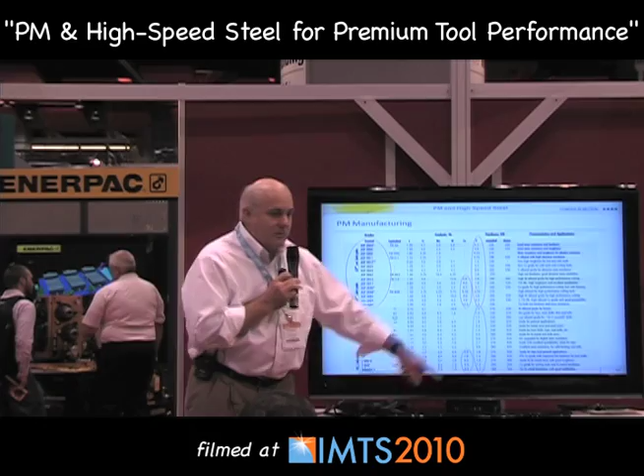But with the PM process, it just gives the simple variation that we can add higher levels. You can see up to 8 or 9% vanadium instead of 1 or 2%. And even in the cobalt grades that are designed for high resistance to softening, we can also put more vanadium in those. So all it does from a user standpoint is it presents us as a steel mill with a method of making steels that have more alloy content in them. So we can widen the range of usable properties.

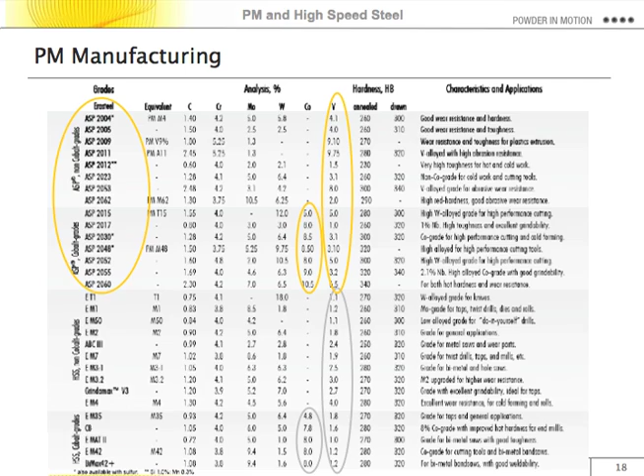For a user, that presents a couple of possibilities. Number one, it means you can take existing tools and look at improving their performance in a number of ways. We can make higher alloy steels. That means we can make them more wear resistant, we can make them more heat resistant, and you can look at them and say, all right, I want to go to a faster speed.

I want to crank my spindles up. I want to go from 70 meters a minute to 100 meters a minute. How do I get there? And when I do that, I'm increasing heat on the tool. What can I use to keep the tool from softening when the heat goes up?

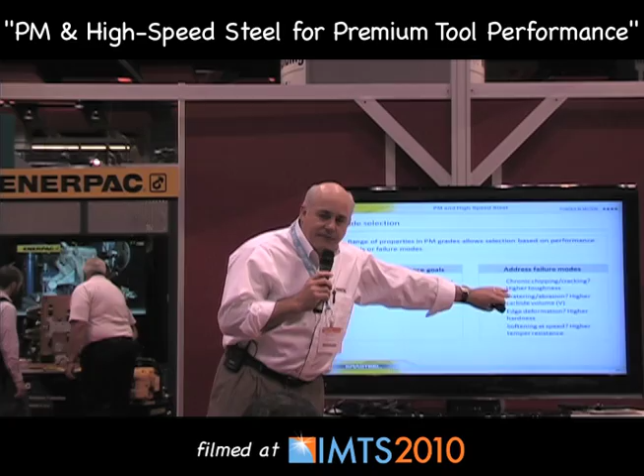Do I have a more abrasive work material that's cutting down my tool life? What can I do to increase the wear resistance of my tooling without going to a more expensive material like carbide? It also presents the option that if you have chronic failures in high-speed steel tools...

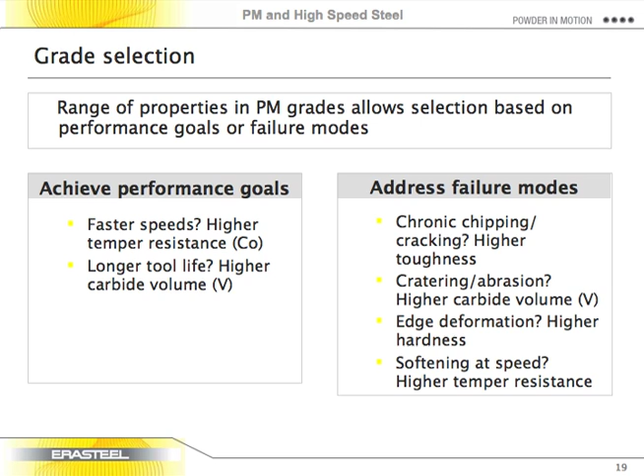If you have a lot of edge chipping, if you have excessively low tool life, you have the ability to find higher levels of those properties to address failure modes, so that if you have chipping, if you have wear, if you have deformation, you can find materials that will address those failures and make your tools a little more successful.

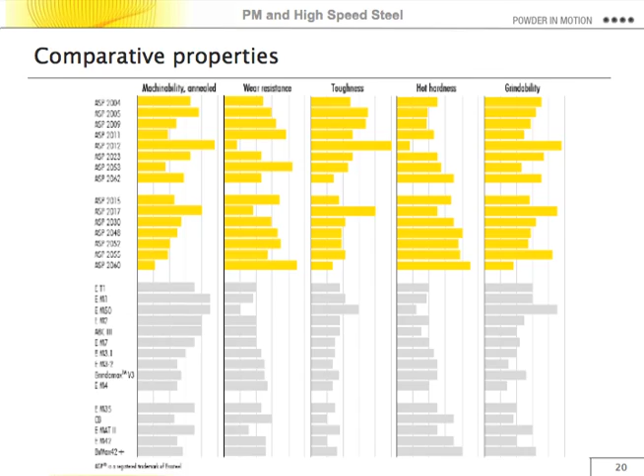Again, we go back to this range of steels and say, rather than look at what steel is what, we look at them, the same steels, just from a background of what properties they offer. And this is just a comparison where we've taken all those same steels and ranked them relative to each other. There's no hard number for the ranking, which are high and which are low in resistance to chipping, in resistance to wear, just in various properties that we would use in selecting a steel.

So the crux of the matter is, if you use steel A, what will steel B do for you? Or if steel A doesn't work, how do you go about picking steel B that's going to be better? So my suggestion is these properties tell you everything you need to know.

If you're using a tool and it's not working, and I'll say for instance M2, if you use an M2 tool, because M2 is a very, very common high-speed steel, and you find that you have chronic chipping or cracking in it, that's an issue that says breakage is inadequate toughness.

So what you need to do is find the steel that you're using and the property that's the limit, and in this case you can look at all these steels and say M2 has this level of toughness, and that means anything else that has a higher level of toughness is a suitable alternative. So it says here's the world of steels that are reasonable for me to use instead of M2. And then you can look at the other properties and say, okay, in this case some of them have less wear resistance than M2.

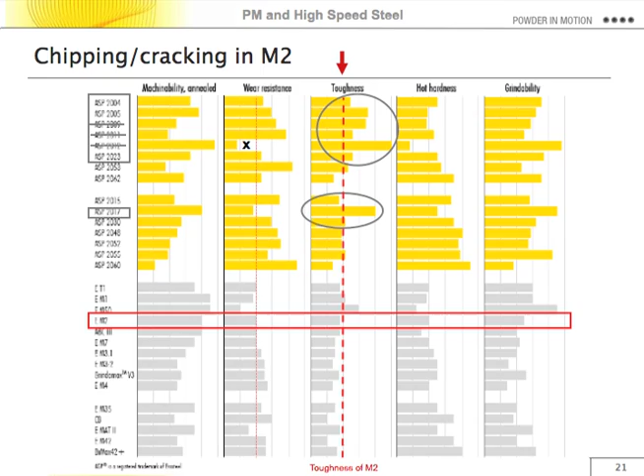I might fix a toughness problem but create a short wear problem, so I'll go through and cross out steels that aren't suitable for that. In this particular case, there are a couple of steels that aren't really high-speed steels for cutting tools, so I'll delete them as well. Basically, it allows you to look at nothing more than the property comparisons and find a list of grades that have better toughness than M2 without sacrificing other properties. So it leads you to alternatives.

The same thing might be done if you have M42 tools. M42 is a very common material used for drills, end mills, and high rotating speed tools. If someone speaks about a cobalt end mill, this is typically the grade they're speaking about. So let's say you have an M42 tool and you'd like to go faster, but your machinery won't support carbide tooling, or you'd like something less expensive. If I go to a faster cutting speed, it's going to create a problem where the heat is worse on the tool - more frictional heating. I need something better than M42 for hot hardness. What are my options there?

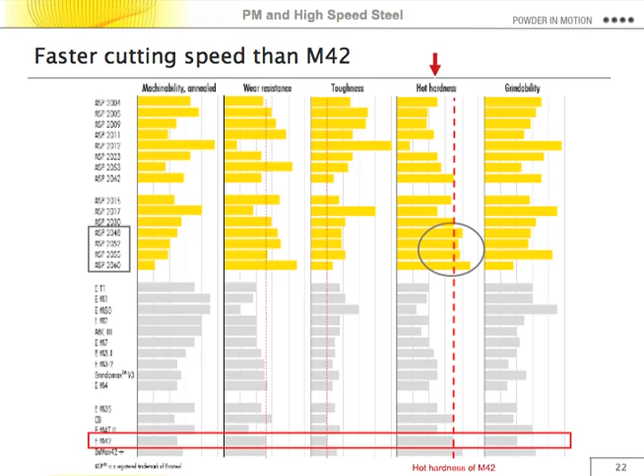We do the same thing. Here's M42, there's the level of hot hardness of M42. So all of these grades show the benefit of higher hot hardness than M42, and then we go through the same process. These are my potential grades. When I go through and compare other properties, it turns out in this case, all of these grades also have the same or better wear properties or toughness, so there aren't any property comparisons that are going to give me problems.

There are going to be some other issues here - you see grindability on the tail end. Some of these grades are quite high in alloy content, and they're going to be a little more difficult to machine or grind. So the fabrication issues may be a trade-off rather than the performance issues. But there's still some opportunities to get better levels of the property that limits the tool life without giving up something else.

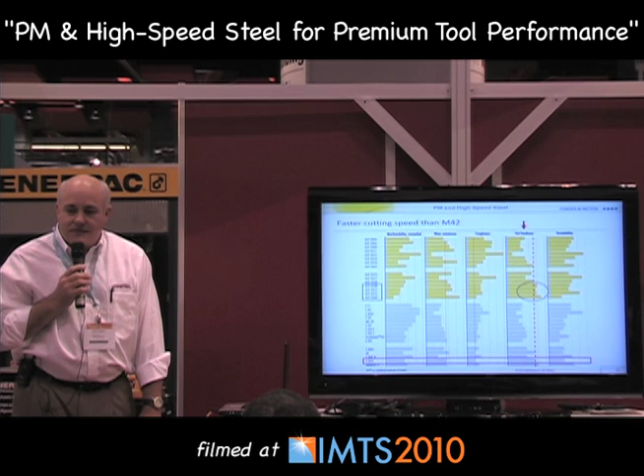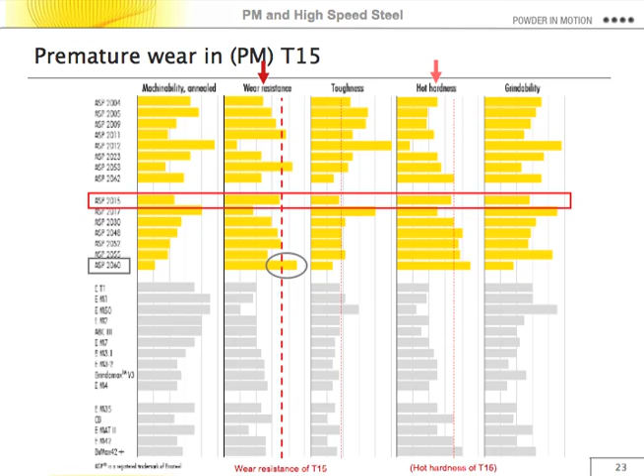Just one other example: T15 is a material that's quite commonly used for broaches, among other applications, form tools, some tools like that. T15 is typically at the high end of abrasion resistance for high-speed steels - it has a very high vanadium content. If you have premature wear in T15 and need something more abrasion resistant, we do the same process - we find wear resistance in T15, and we're looking for anything more wear resistant than T15. As it turns out, there's really only one grade. There aren't a lot of grades more wear resistant than T15. In this case, there's really only one. This other grade up here is not actually a high-speed steel.

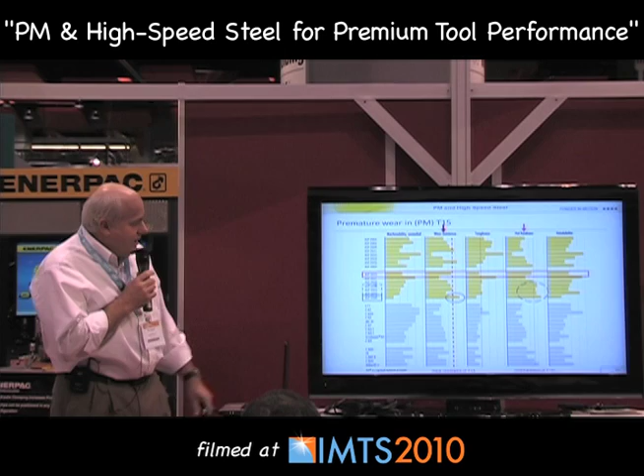However, it may be that in the cutting applications for T15, it's not just abrasion resistance, but perhaps it's softening too much. T15 doesn't have the highest red hardness, or hot hardness. So just to create a few more options here, it may be that materials offering higher hot hardness might be potential alternatives for the application of T15. So again, we come up with a number of materials that offer the same level of these properties and address the limitation in hot hardness, to pick for an application like that.

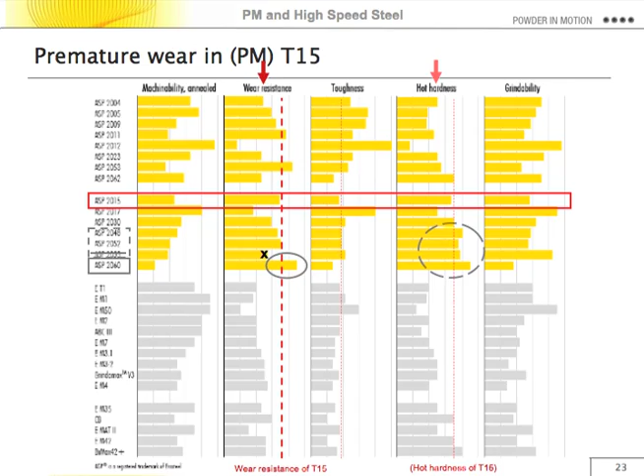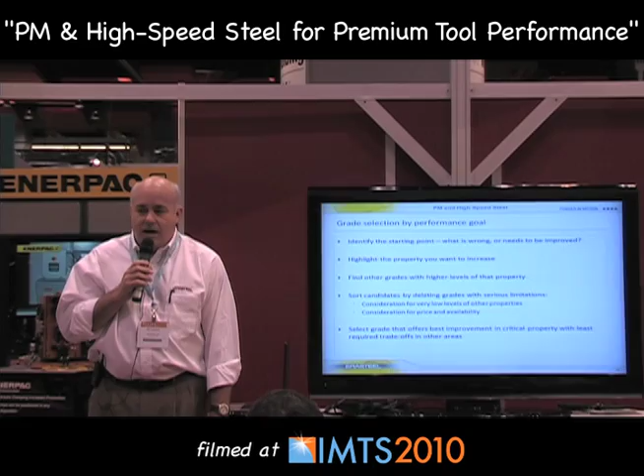So it boils down to a simple process of ignoring what the steel sellers have in their data sheets everywhere except in the property listings. From the standpoint of the steel mill, we look at things as chemistries - that's how we make them, so that's how we segregate them in our minds. But users need to look at them ignoring how we make them and what's in them, keeping in mind that you're looking for the properties. How are they going to work in the performance you're looking for? So anytime you're looking for a different material, you start by identifying what's the starting point.

What property is it that needs to be improved? Once you identify the property that needs to be improved, you go through this process of finding a material that has a higher level of that property, making sure it doesn't give up some other critical property in between, and you come up with a listing of potential alternatives to whatever material you're using.

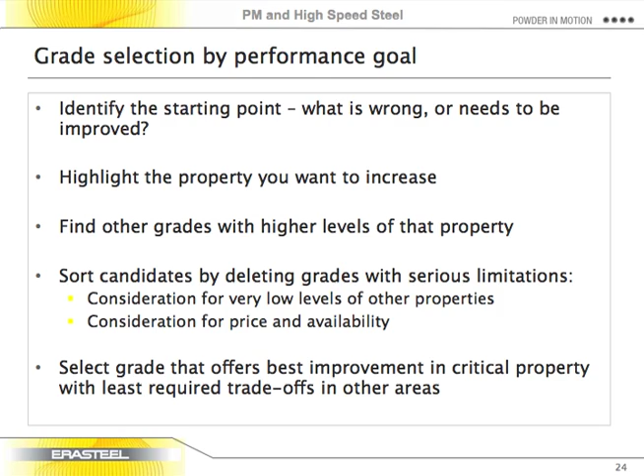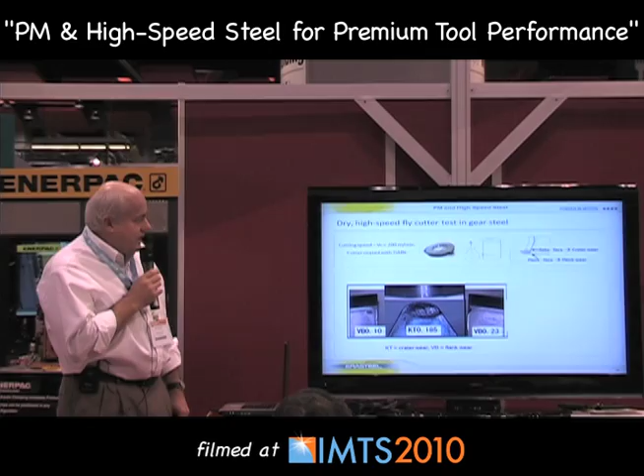I'll point out a couple of real-life applications of that kind of decision making. In this case, we had a customer who was looking for better wear life in a cutting tool. They made a simple fly cutter as a test tool, a single point tool, and ran it in different materials to see how much crater wear and flank wear they would get.

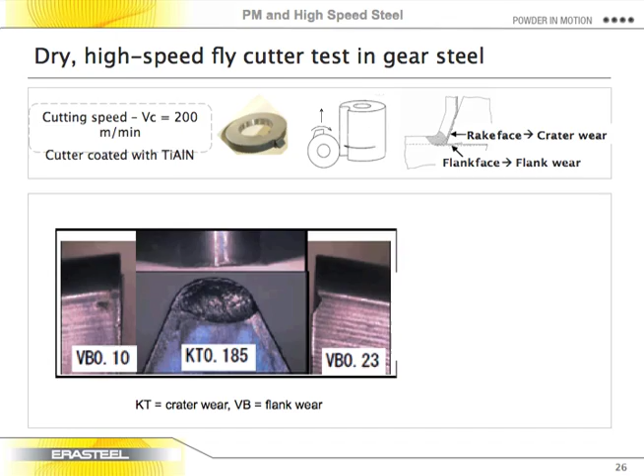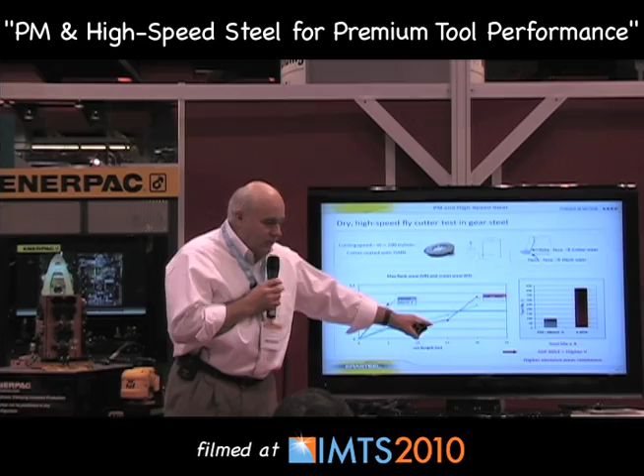What they did in this case was look for a material with higher vanadium. If you remember, vanadium is really what tends to affect the wear properties among high-speed steel tools. By going to a grade with higher vanadium than the standard material, they were able to get less wear, so they could either cut a longer length of material before reaching the same wear, or get less wear after cutting the same amount of material.

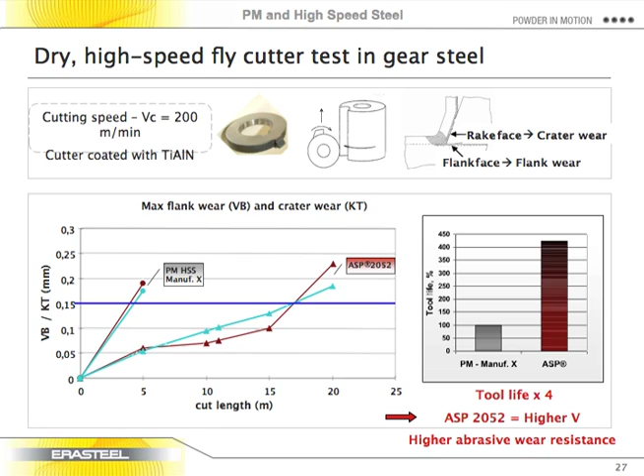In this particular case, it was just a single point test tool cutting gear materials, but just to simulate what might be happening, for instance, with hob teeth cutting gear blanks.

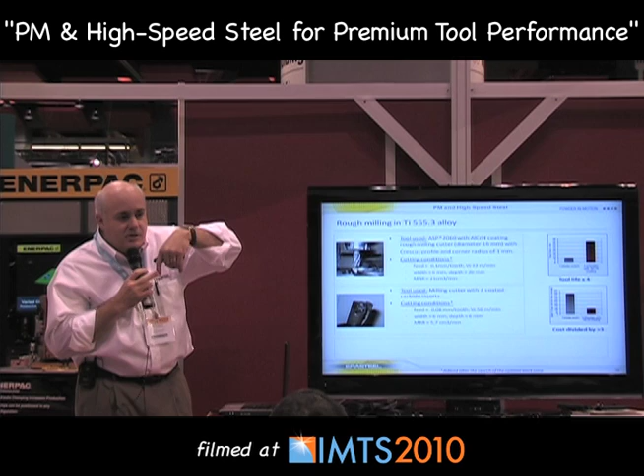Another application was looking for an alternative to carbide for cutting an aerospace titanium alloy. The cutting conditions are a little different because carbide cuts at much higher speeds than steel tools. The change was partly because the carbide tools were chipping, but also because, in working with the cutting conditions, it was possible to take a much deeper cut with the high-speed steel, since its better toughness compared to carbide let it take a much deeper cut and a much greater side load without breaking.

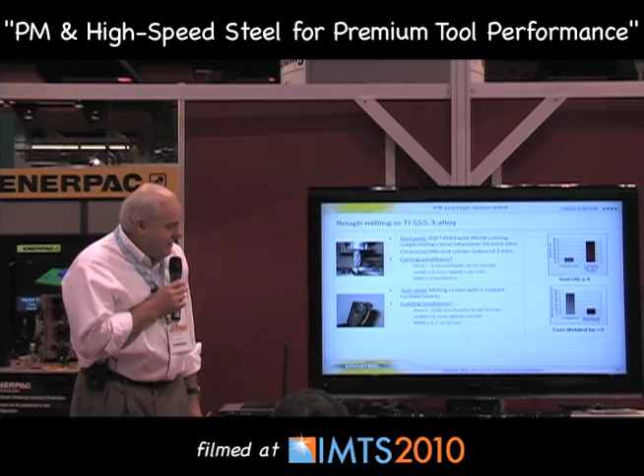In the end, even at a slower cutting speed, the customer was able to develop a material whose material removal rate was greater than that of carbide, simply because it was able to cut a much deeper path through the titanium being cut.

Finally, just an interesting side bit: we had a customer who needed to tap holes in a carbon fiber composite and was finding the fiber components very abrasive on standard taps, while the tap geometry was too brittle to use carbide taps. So they hunted around for something better than standard tap material without going to carbide, and were able to use one of these PM manufactured materials to get enough toughness to make the tap and enough wear resistance to make the holes. It's just an example of finding the combination of properties needed to make the tool hold together.

As I said, we make all of our own steel, we sell our steel, and we also provide services behind it. Services like this, we like to get out and talk to the customers. We do have a development lab, fueled by feedback from our field. We probably learn a lot more from our customers than they ever hear from us. So something like this is an example of some of the things we can offer.

We have service centers to provide material availability, developmental centers and technical support to provide that. Also, all of the technical services, the heat treat information, and the data sheets about the grades are available at our booth or online.

Finally, we just want to make the point that we are here in the States as well as extremely larger in Europe. We are a French-based company with a much bigger presence in the European market. In the last year or so, we have made a big expansion in our sales here in the States, so the product is here and on the ground.